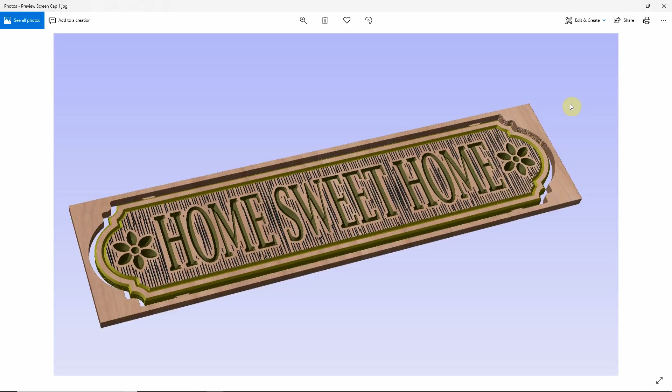To get the file for this home sweet home sign, I really had to dig down deep into the old treasure chest to find it. The file came from a blog post from the Vectric Labs blog, December of 2014.

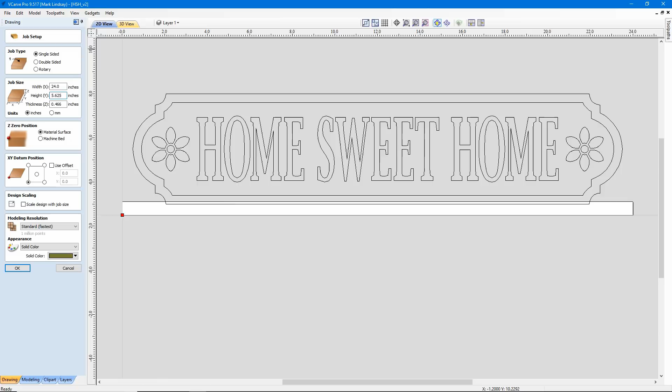Now I can add the 5 inches up here at the beginning. My material changes and I'm all set. The thickness of my material, they have 0.466. My material is 13/16 of an inch thick. So again, I'm going to use the built-in calculator to type in 13/16, tap the equals button. Now I have the material thickness entered here.

I'm using inches. My Z0 position, I'm setting to the material surface. Because I don't really have any layout to do, it's already been done for me. I'm going to go ahead and leave my XY datum at the lower left position, because that's where I set my X, Y, and Z0 out on the machine. I'm going to leave everything else the way it is. Click OK.

Immediately we can see when I change the width or the height in Y of my material, all of this got changed. It's no longer centered. So I'm going to hold down the control button on my keyboard, tap the letter A to select all of the vectors. Then I'll come over here to align selected objects and align it to the material. I want to center it vertically as well as horizontally. Then I can come down here and click close, and we're all set.

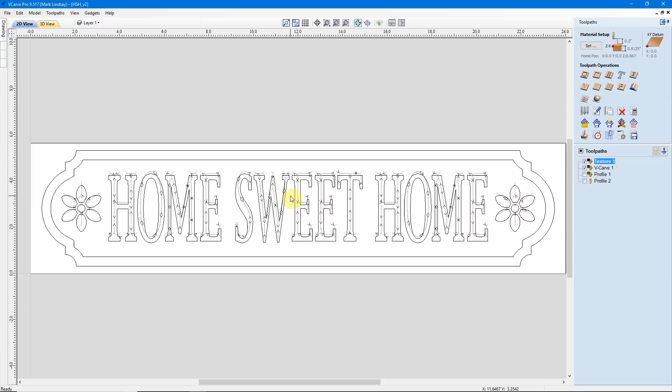VCarve 1 does have vectors. But we see, if we zoom in, these toolpaths are way, way, way off. We need to recalculate these because we've moved the vectors on our material. So I'll uncheck. I'll come back up here because Texture relies so heavily on these other toolpaths, I'm going to recalculate it last.

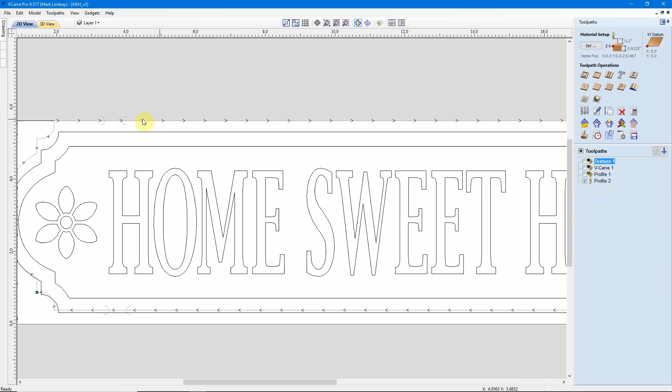So the first thing I'm going to do is come down here and I'm going to recalculate the Profile 2, which is the outside cutout of our project. We can see it's still trying to cut way up here when the profile is down here. So I'll double click that profile, and we're going to start at the top.

The cut depth for this is based off of the old material thickness. So I need to change that because my material thickness is different from theirs. So I'm going to do what I always do, type in Z plus 0.005 because I want the bit to cut 0.005 of an inch deeper than the material thickness. Then tap the equals button and it's adjusted the cut depth up here.

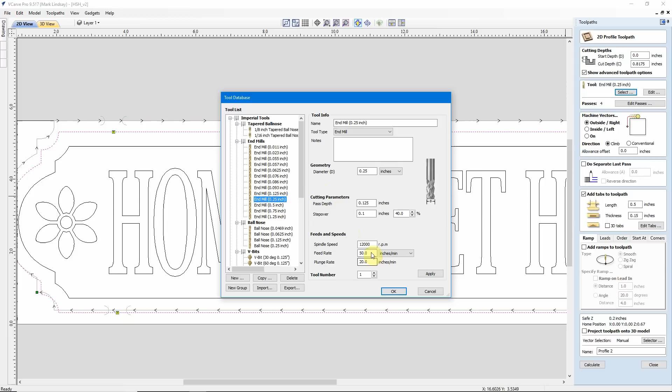They're using a 1/4 inch end mill. That's fine. But I still need to get in and make sure that the 1/4 inch end mill that they're using matches mine. What I mean by that is their selection, their 1/4 inch end mill, their feeds and speeds may be different. So I'm going to choose my 1/4 inch end mill using my feeds and speeds. Click OK, and now we see mine's going to take 7 passes, where before theirs was going to take 4.

Because this is an outside profile toolpath, I want to cut to the outside. Climb or conventional, that's up to you. I prefer to do a separate last pass with an allowance of 0.01. This means the bit's going to cut the first 6 passes just slightly larger, slightly to the outside by 0.010 of an inch of this vector. Then on the last pass, the bit will come in that 0.010 of an inch and cut the entire profile of this project at full depth. Make certain the bit that you're using has a cutting edge large enough, deep enough to cut this deep.

Add tabs has already been done. The tabs they're using are 1/2 inch by 0.15, a little more than 1/8 of an inch thick. That's fine, but I'm going to use 3D tabs. I'm not going to worry about ramping the toolpath. I am going to make sure I have sharp external corners selected. We'll come down here. I'm going to change the name of it to Profile Cutout just to avoid confusion there.

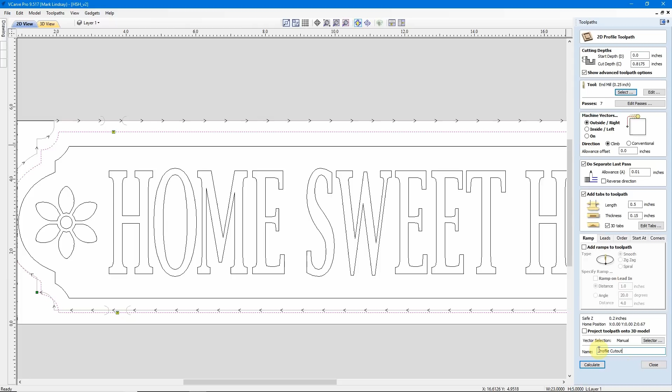And we'll click Calculate. It's warning me the tool will cut through the material. I know that. And we see that the tool path has dropped down from here. It's no longer trying to cut out on the edge. It's centered itself within the material. Now I'll close this. I'll move up, uncheck that, move up to Profile 1, and I'll do the same thing.

I'm going to go through and make sure that all of these settings here will match my machine, match my tools. They've selected a cutting depth of 0.1. I'm going to leave that alone. That's what I would set it at as well. Now they're using a V-bit, a 90-degree V-bit with a 1/2 inch cutting diameter. Let's take a look at what their parameters are. They're running a feed rate of 100 inches per minute and a plunge rate of 30 inches per minute. Well, that may work fine for your machine. It may not work fine for your machine.

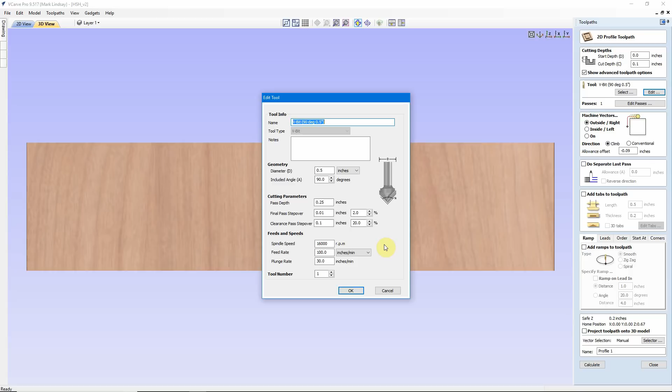So I'll cancel that. I'm going to select my V-bit, which is slightly larger. My V-bit is a Bosch 9/16 diameter V-bit, and I have my own feeds and speeds set for that. This is what I mean. These tool paths were calculated for their machine, which could be a big professional machine that's capable of cutting through 13/16 inch thick cherry in one pass. Mine isn't quite that stout, so I have to adjust for my CNC machine.

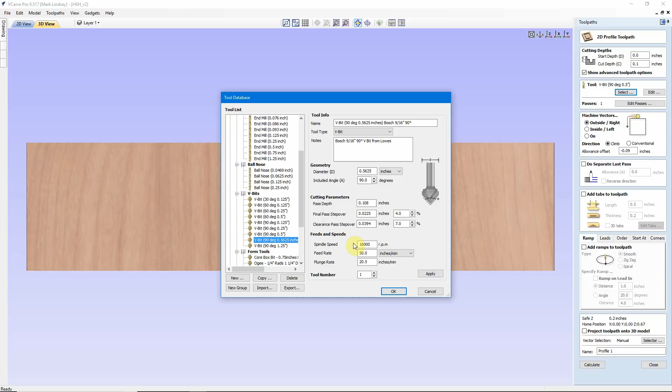I've got that bit selected. I'll click OK. The rest of this I'm going to leave alone. I don't need to change outside. They're using an allowance offset. I'm going to leave it alone. I'm not going to do a separate last pass with this. I'm going to come down here and call this Profile VCarve so that I know this is the one that uses the V-bit. And I'll click Calculate.

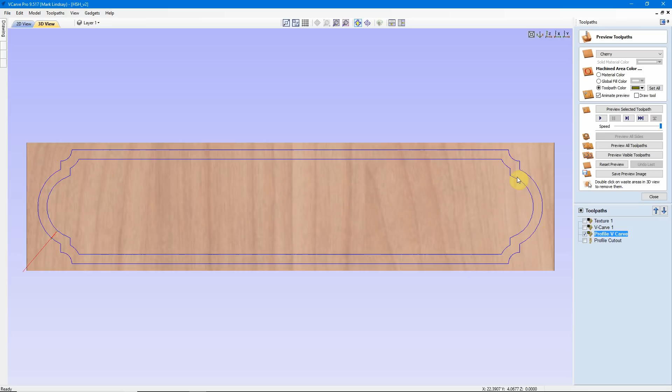This is the tool path that is carving the chamfer on the outside of the project and that V-groove detail inside the project. I'll uncheck that and close the preview window, and come up here to VCarve number 1. This is the text.

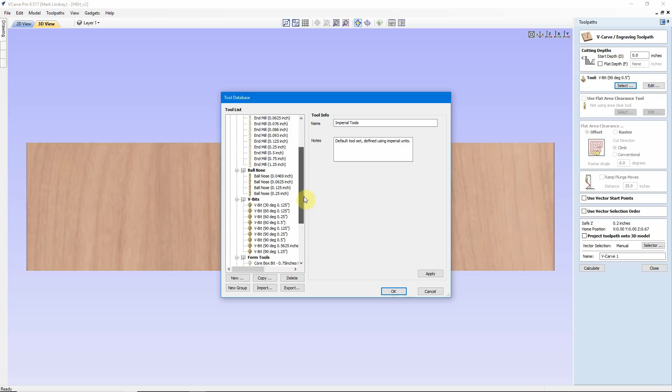We're going to be using a start depth of 0. Flat depth is not selected. I'm going to select my own 90-degree V-bit here using my own feeds and speeds. Click OK.

Because I'm not using a flat depth, all of this is grayed out. I'll go ahead and change the name to VCarve text. It's also going to cut those flowers. Click Calculate, and there's our tool path there.

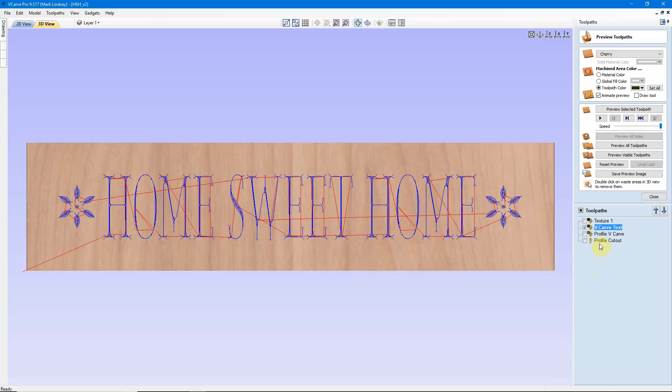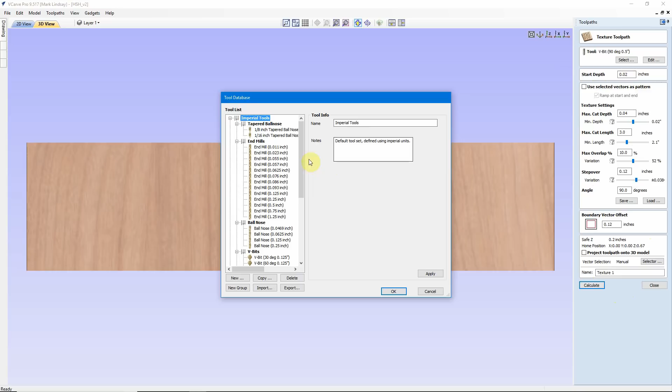Now we're going to get into the texture. Because all these others have been recalculated, this should work on its own. Double click Texture. I'm going to change none of these settings. Except use my V-bit. I have my Bosch V-bit set up here, and I'll calculate.

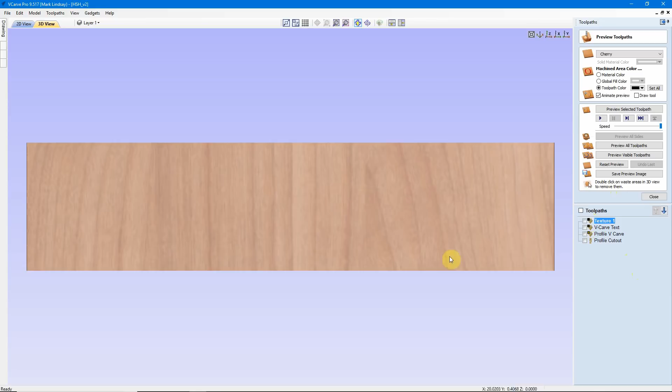There is the texture toolpath that it's going to cut. Now, I have not previewed any of these toolpaths, so we'll go through them one by one and see how they look.

I've got texture highlighted. I'll go ahead and preview that selected toolpath. And we see here that because I have my toolpath color set to black, we can see what texture that's going to carve in the material.

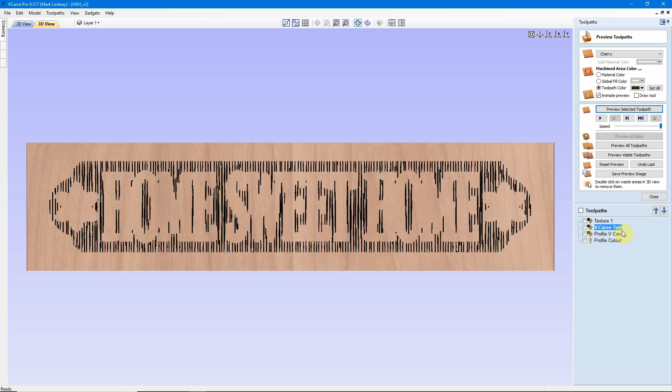We'll go to VCarve Text, preview that toolpath, and that's going to carve our text and those flowers on the ends. Now I've colored those dark green so that we can zoom in here and see the difference. You get a little bit of contrast and I can see what's going on.

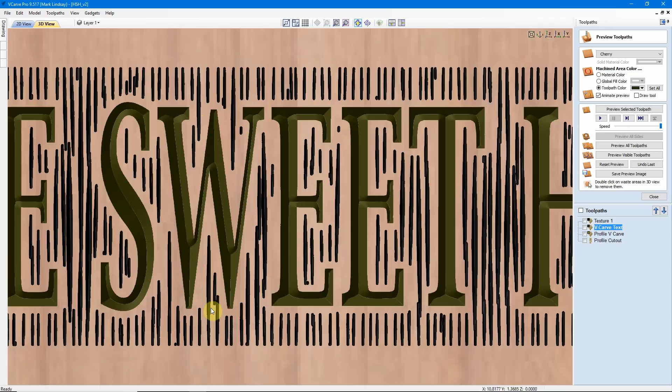And we see how these texturing marks are spaced away from the text. They don't interfere with the text at all. It just kind of fills in a little bit and gives some interest in an otherwise blank area. Go ahead and zoom back out to a straight Z view.

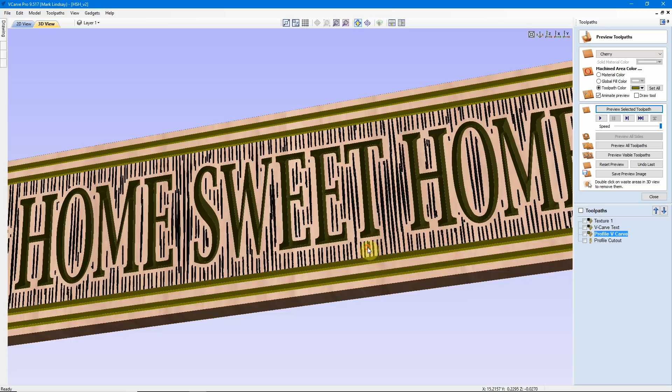Now we'll preview our profile VCarve. Preview that selected toolpath. I've colored those a little bit lighter green. And we can see here the detail V-carving in here in the center.

Also cuts into these texture lines, cleans up any rough edges here so that we don't have to worry about any additional sanding needed around this area. I think it just gives a nice level of detail.

Also have our chamfer cut for the outside profile. We'll go ahead and preview that profile cutout. Preview that selected toolpath. There we go.

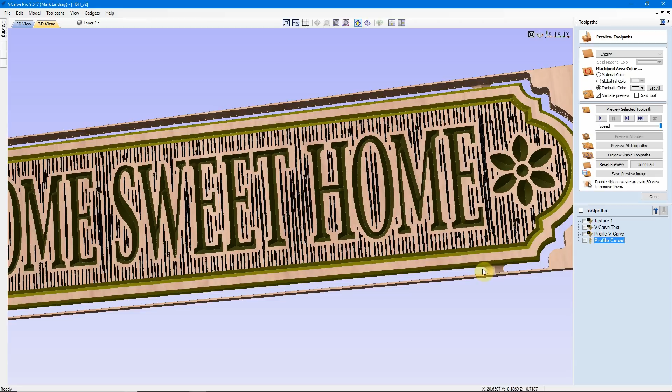My tabs are nice and thick, a little more than 1/8 of an inch thick, and they're about a 1/2 inch long. They'll be easy to clean up. All in all, I think this is going to be a nice project. This is what we want to do.

I'm ready to save G-code and take it outside, start cutting on the CNC. So to do that, I'm going to come up here and hover my mouse cursor over each toolpath's name.

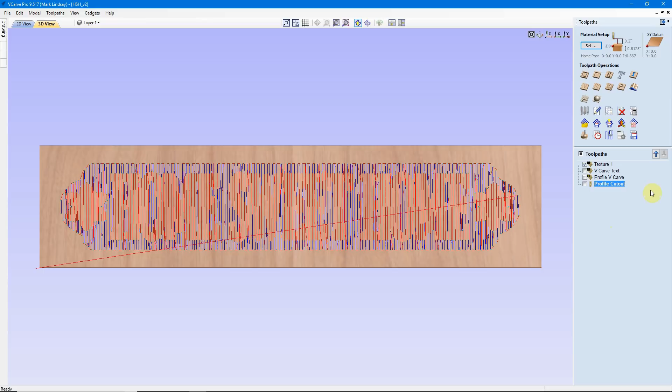I see that this one uses a 90-degree V-bit, so I'll put a check mark there. This one also uses a 90-degree V-bit, I can put a check mark here. This one also uses the 90-degree V-bit, I can put a check mark there.

This one uses a 1/4 inch end mill, I'll leave it blank. Now I'll come up to Save Toolpath, put a check mark and output all visible toolpaths to one file. Every toolpath I have down here that uses a V-bit is going to be saved to this one file.

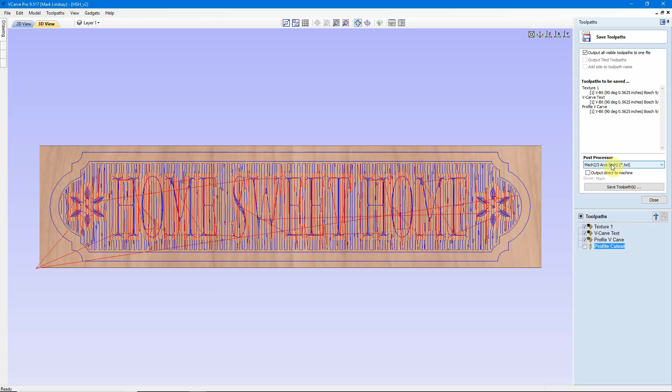My post processor is selected. This is something that is a set it and forget it kind of operation. Once you have the correct post processor, you'll more than likely never touch this again. And I'll click on Save Toolpaths.

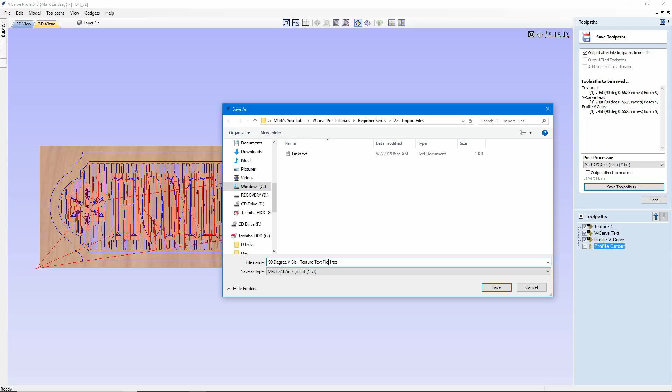I'll go ahead and save it in this folder, and I'm going to name this toolpath 90-degree V-bit texture text flowers. Then I'll save that.

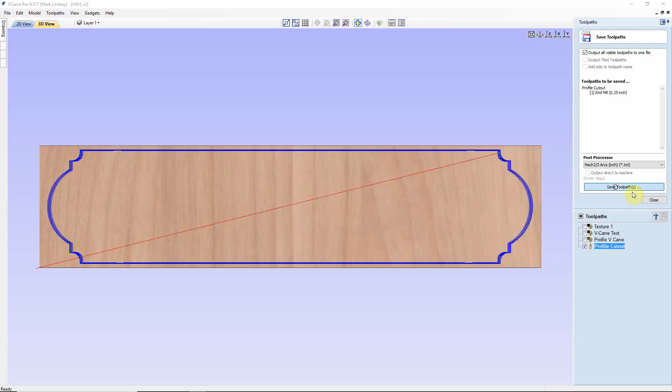Once that's saved, I can uncheck all of these toolpaths, check my profile cutout, make sure that this is all up here correctly. Save toolpaths, profile cutout is already highlighted.

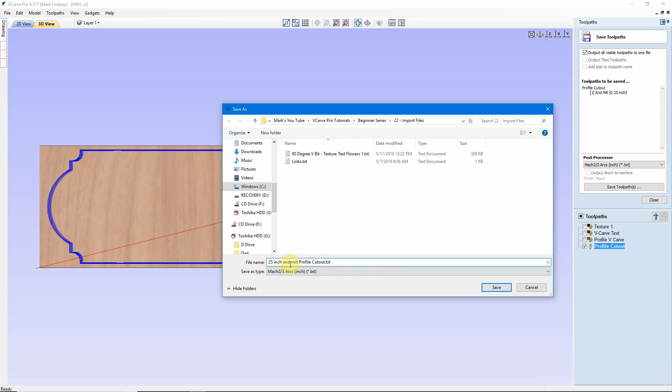I'm just going to add... 25 inch end mill. I know it's 0.25, I know it's not a 25 inch end mill. And I'll save the toolpath. Now I'm ready to take those two G-code files outside to the CNC and get ready to cut.

Okay, with the files transferred over onto the computer, I fired up Mach 3, I have the CNC homed. Now I'm ready to mount the piece of material to the table.

Now I'm going to be cutting this project out of this piece of cherry. We entered 5 5/8 inch for the width because, as you can see, one of these edges is surfaced, nice and smooth, but the other edge is rough sawn. 5 5/8 of an inch happened to be the narrowest measurement I got from side to side here.

To make sure that I get that piece of material lined up with the x-axis travel on my CNC, I'm going to use this alignment jig that I made in a previous video. I'll put a link to that video where I showed how I made this alignment jig down in the description box below. You can check that out if you'd like to.

For actually mounting the piece of material to the table, I'm going to use my tried and true masking tape and CA glue method. That way I don't have any screws or clamps to concern myself with. It'll hold this piece of material down firmly through all of the machining operations we're going to do.

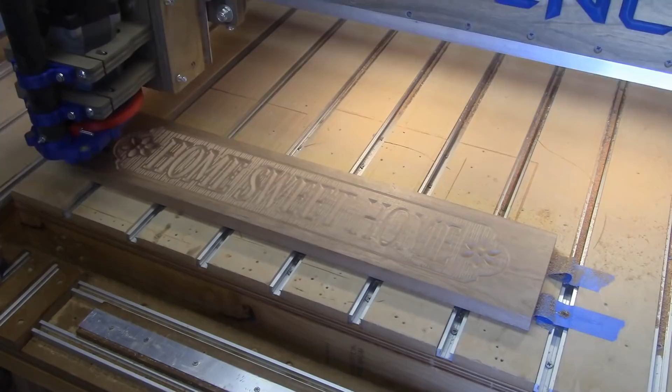And now it's time for a tool change. So let me bring my router up, shut off my lockout.

For the profile toolpath, I'm going to be using this Amana Spectra coated 1/4 inch downcut end mill. Now, that's the first time I've used this bit, we'll see how it goes. I've not had this bit in the router yet, so we'll find out.

Okay, now it's time to go ahead and cut it out from the tabs and take it off the table. So I'll go ahead and use my oscillating multi-tool for this. An old dead wood chisel makes quick work of lifting this piece up off the table. There we go. Now all I need to do is peel the tape off of it.